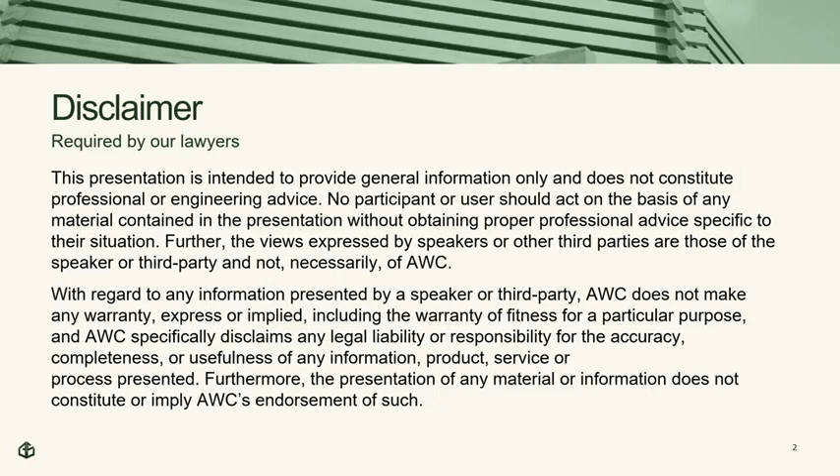AWC received ANSI approval of its 2024 Fire Design Specification for Wood Construction as an American National Standard on September 28, 2023. The standard, designated as FDS 2024, is primarily the 2022 version of the Fire Design Specification that has been revised to better coordinate with Chapter 16 of the 2024 National Design Specification for Wood Construction.

The FDS brings together provisions for fire design of wood members, assemblies, and connections to meet code requirements. This presentation will discuss the history of fire design provisions for wood construction, existing wood design provisions currently in building codes, wood design standards, and numerous design aids incorporated into the standard, and adds additional calculation procedures to address the added fire resistance and thermal benefits of protection provided by wood cover, gypsum panel products, and insulation.

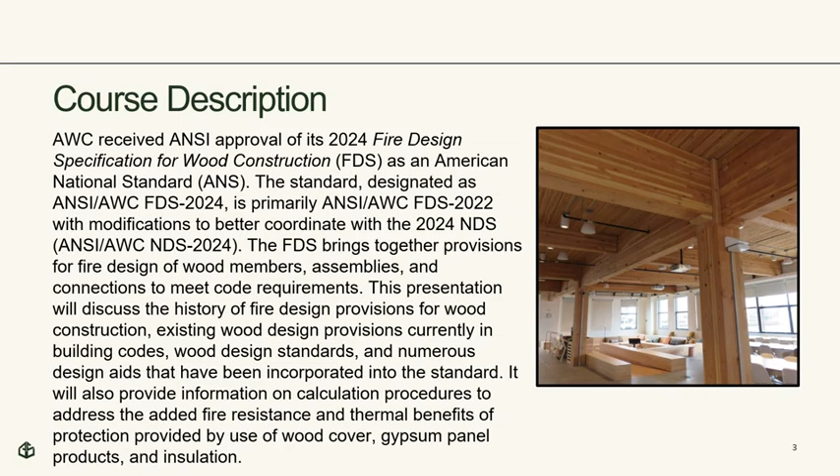The learning objectives for today's webinar are: discuss the history of fire design provisions for wood construction and fire research data for protected wood members; explore general information about the Fire Design Specification standard, including definitions and notations as well as general fire design requirements; examine the specifications listed in the FDS for ignition and flammability requirements for wood products; and review calculation procedures used to address the added fire resistance and thermal benefits of protection provided by the use of additional wood cover, gypsum panel products, and insulation.

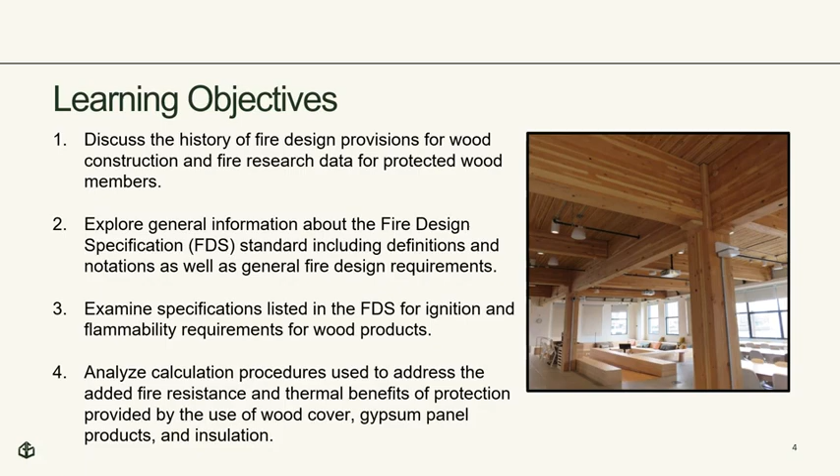Before I get into the discussion about the Fire Design Specification, I'd like to provide a bit of history on how we arrived at a point where the standard was developed.

For decades, researchers worked on methods of predicting the fire resistance of wood products. Since there were no calculation procedures, the wood industry, along with other material groups, ran comparative tests of structural members and assemblies in order to provide some level of acceptance. Wood products were specifically targeted because they were combustible materials that, even though they had good structural fire performance, better than some materials, it still needed a benchmark level.

A particular interest was heavy timber mill and warehouse buildings that were being retrofitted for new mercantile and multifamily occupancies. Designers were concerned about the fire performance of these buildings, even though there were literally hundreds of years of experience with their performance.

In 1977, T.T. Lie, a researcher with the National Research Council of Canada, published a report outlining an empirical method for estimating the fire resistance time of large beams and columns. That method was adopted in the National Building Code of Canada shortly thereafter.

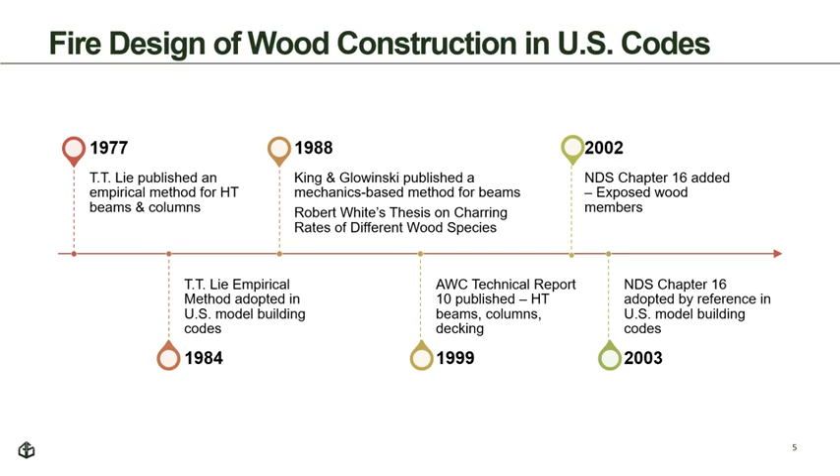Work continued on TR10. In 2013, the mechanics-based nonlinear char model was used to predict results of unprotected floor joist assembly tests. As a result of the model's ability to predict the performance of full-scale wood frame joist floor tests, it has been used as a basis for membrane protection provisions for wood I-joists.

The limitations of applying the model to only large cross-section wood members was removed from TR10 and the NDS Chapter 16 in 2013.

In 2015, the model was used to accurately predict fire test results of exposed structural composite lumber, beams, and columns. Also introduced for the first time was a new model for exposed cross-laminated timber. The cross-laminated timber char model was the first deviation from the original nonlinear char model. While the CLT model uses the nonlinear char model, it resets as the char front reaches the glue line between each layer.

In 2015, the NDS Chapter 16 provisions were expanded to cover structural composite lumber products that had been tested, i.e. laminated veneer lumber (LVL), parallel strand lumber (PSL), and laminated strand lumber (LSL). Also, a new cross-laminated timber stepwise char model was introduced for CLT design.

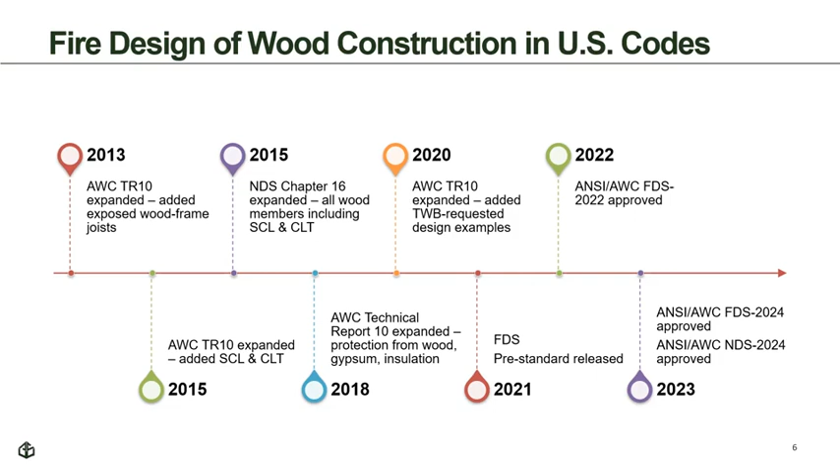Here are some of the modeling results of protected wood members used in the development of TR10. Again, the diagonal line indicates where the modeling results equal the test results. Data points above the line are over-predicted and points below the line are under-predicted.

Top left is gypsum wallboard protected stud walls. Below on the left is gypsum wallboard protected floor ceiling assemblies. The upper center shows burn through of rim boards. Lower is burn through of gypsum wallboard protected rim boards. Top right is gypsum wallboard protected SCL beams. And bottom right is gypsum wallboard protected CLT floor slabs.

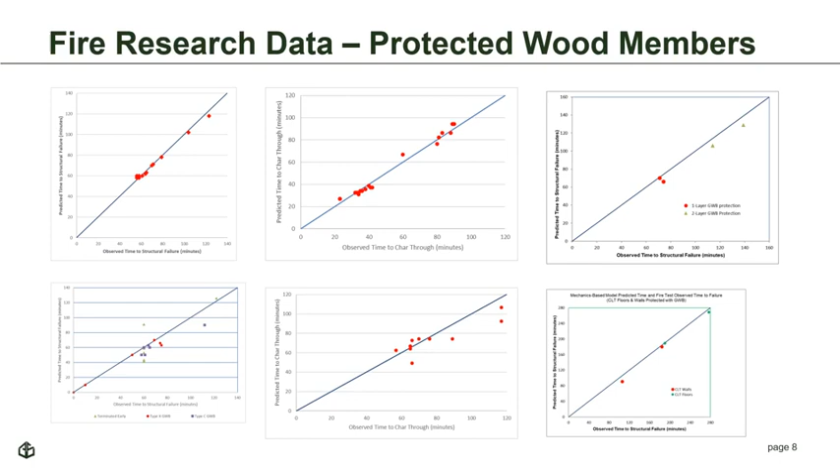One more graphic to demonstrate how the new provisions in TR10 and the FDS are being used. These test results were used to determine the contribution of gypsum wallboard protection for tall mass timber, types 4A and B construction. In this test series, otherwise identical assemblies were tested with no protection, i.e. the control, one layer of 5/8 type X gypsum board, and three layers of 5/8 type X gypsum board.

Each test was taken to either structural failure or a mid-span deflection of 12 inches, which corresponded to structural failure in the first unprotected test.

As can be seen here, a single layer of 5/8 type X added 41 minutes and 3 layers of 5/8 type X added 127 minutes, which averages out to about 42 minutes per layer. Altogether, these tests confirmed that 40 minutes of protection time can be assigned to each layer of 5/8 type X gypsum board when it is used as a non-combustible protection on mass timber.

Not coincidentally, this also corroborates the 40-minute time assigned to 5/8 type X gypsum board in the Fire Design Specification provisions and in the IBC section 722.6 when it is used as a membrane in light frame wood assemblies.

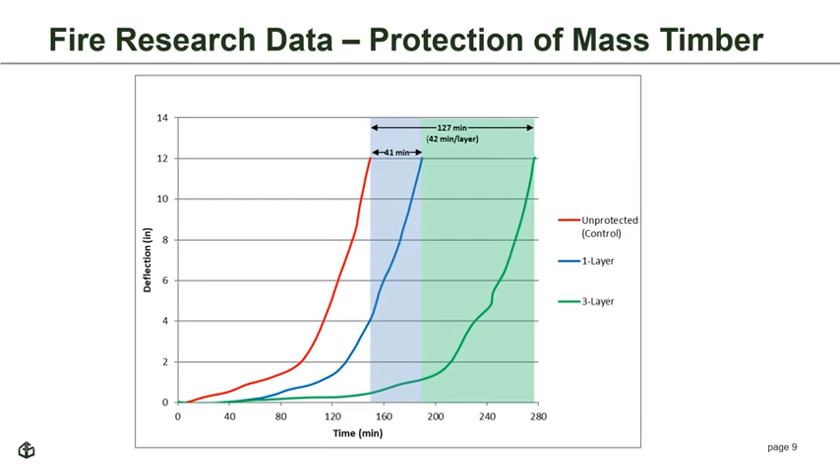The 2022 Fire Design Specification for wood construction was completed in August of 2022 and was approved as an American National Standard on September 13, 2022. While design provisions for exposed wood members have been in the National Design Specification since 2002, the 2022 Fire Design Specification goes well beyond the NDS, covering such things as design of fire protection of wood members, design provisions for thermal separation and burn through, design of protection of connections, design for fire blocking, draft stopping, and much more.

However, work to update the 2018 National Design Specification to the 2024 version was still underway. As part of that update process, it was acknowledged that coordinating changes needed to be made to the 2018 NDS Chapter 16 and the 2022 Fire Design Specification. For the most part, these changes were primarily to section numbers and other provisions in both standards. There were also changes to the scope in the NDS Chapter 16 and similarly the scope of the Fire Design Specification. There were also a couple of technical changes primarily to clarify the intent of the provisions in the 2022 Fire Design Specification.

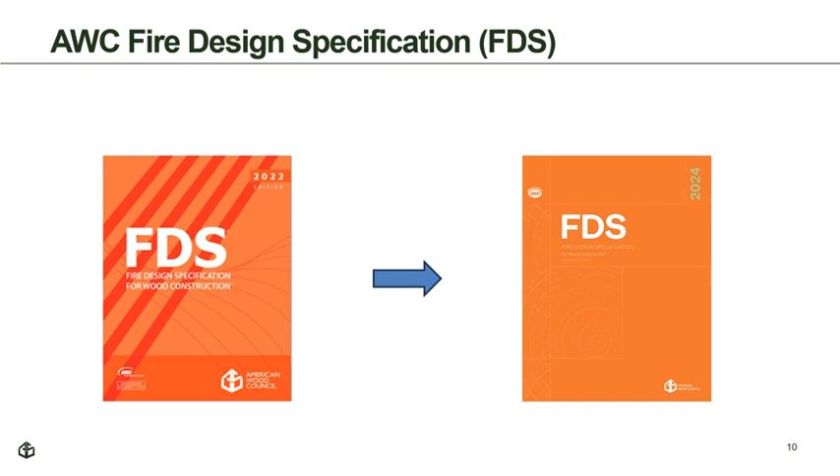Okay, so let's get into the Fire Design Specification for wood construction. Chapter 1 provides general information about the standard, provides definitions and notations as well as general fire design requirements. Section 1.2 terminology updates definitions of terms used in fire design specifically to address wood construction. Section 1.4 material standards provides identification of building material and product standards and special requirements for fire design.

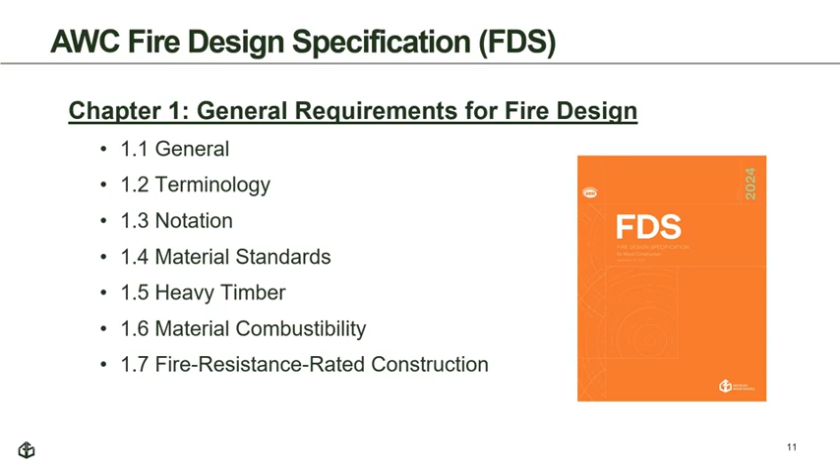Section 1.5 heavy timber enhances descriptions of heavy timber elements that are currently in the building code and clarifies dimensional requirements for heavy timber framing, dimensional construction requirements for heavy timber roof decks and floor decks and walls, and it adds acceptable types of toppings for heavy timber floor decks. One of the specific additions is the allowance of concrete or gypsum concrete toppings as a heavy timber floor deck.

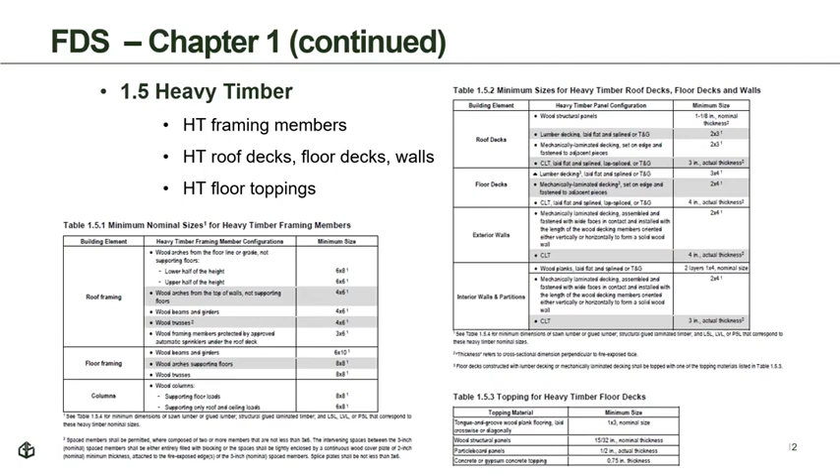Section 1.6, Material Combustibility, clarifies requirements for combustible and non-combustible materials. It brings forward a building code exception that allows certain composite products like gypsum panels to be considered non-combustible materials, even though they usually have a combustible facer on the product. The provisions also clarify that if a product is not considered non-combustible, it is combustible and subject to the requirements in Chapter 2 of the Fire Design Specification.

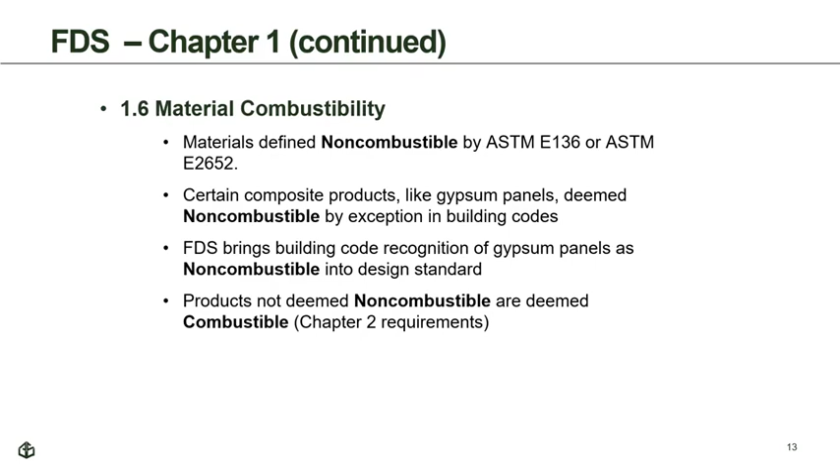Section 1.7 of the Fire Design Specification provides design information of fire-resistant rated construction. This chapter was extensively revised between the FDS pre-standard and the 2024 Fire Design Specification.

It clarifies requirements for fire-resistant rated wood members and assemblies. It adds clarifying requirements for continuity of fire resistance rating for assemblies, not continuity of the assembly itself, which was clarified in the 2024 IBC. It adds requirements for supporting fire-resistant rated assemblies, including special requirements for platform construction, which was also clarified in the 2024 IBC.

It clarifies that where a wood column is in a wood frame wall assembly, protection provided by the wall assembly can be included as part of the structural fire resistance of the design of the portion of the column. Where the column is entirely within the fire resistant rated wall assembly, the column can be assumed to have the same fire resistance rating as the wood wall assembly.

This is a slight difference in wording from what is in the code now, because some people have interpreted the current code language to only allow the fire resistance rating if it's the same as the wall, where this provision would allow the contribution from the wall to be included as a portion of the column protection. It's a slight nuance, but if you read through the code provision, you'll see the difference.

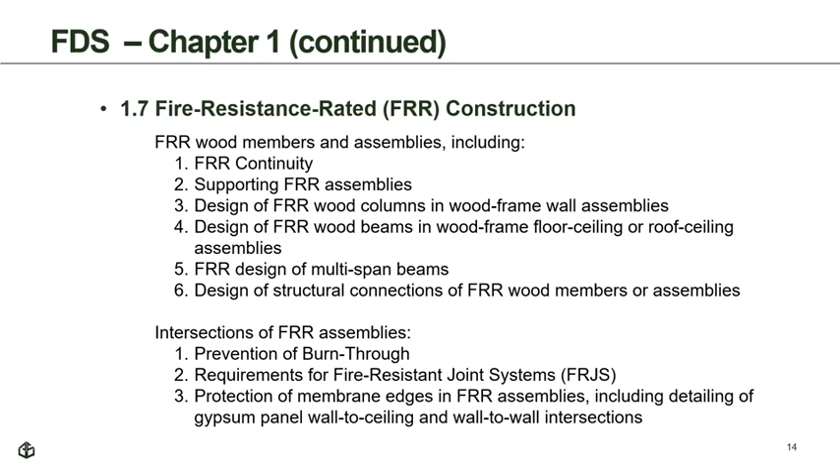Chapter 2 of the Fire Design Specification specifies ignition and flammability requirements for wood products and provides reference test standards to be used to show compliance with these requirements.

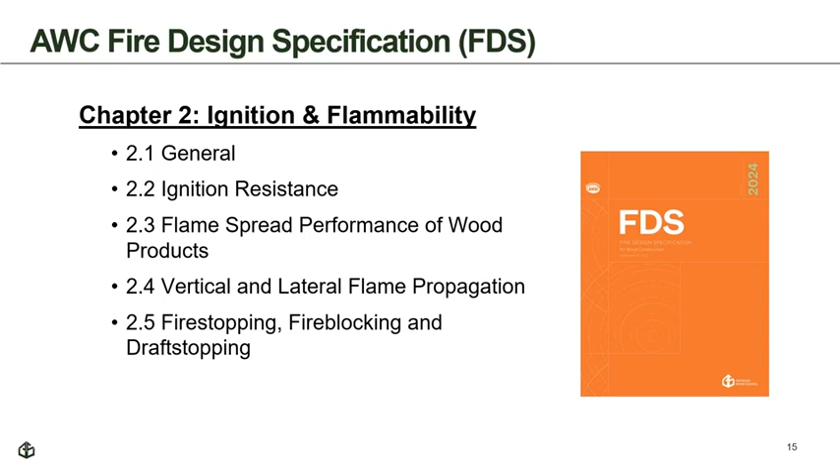Section 2.2 clarifies requirements for ignition resistance of wood products used on exterior surfaces. Wood products are typically exempt from the current NFPA 268 test because ignition usually occurs at or above a heat flux of 12.5 kilowatts per meter squared for wood products. But wood products are prescriptively limited in their use as exterior coverings because they are defined as combustible.

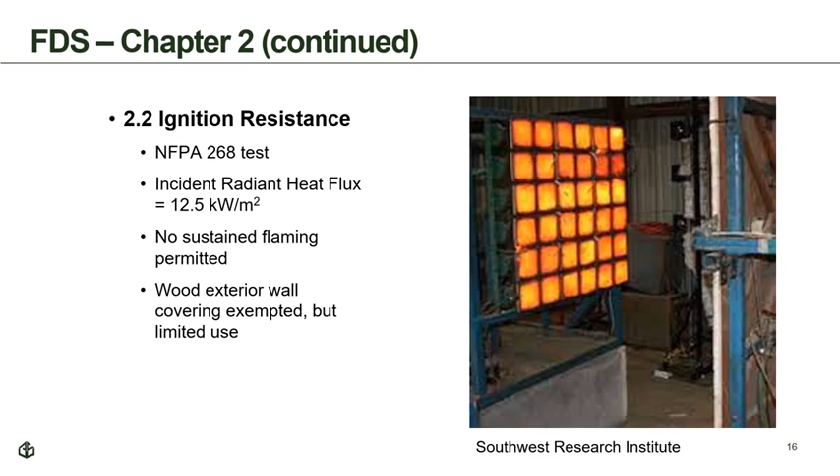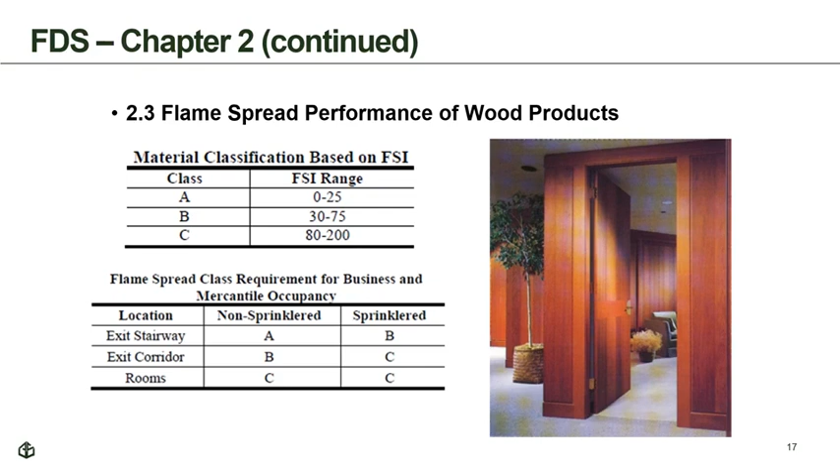Section 2.3 clarifies requirements for flammability of wood products. The wood industry has conducted extensive E84 testing of lumber species and wood panel products. AWC's DCA1 contains a list of industry E84 flame spread and smoke development test results. That list has now been incorporated into the Fire Design Specification's Supplement A.

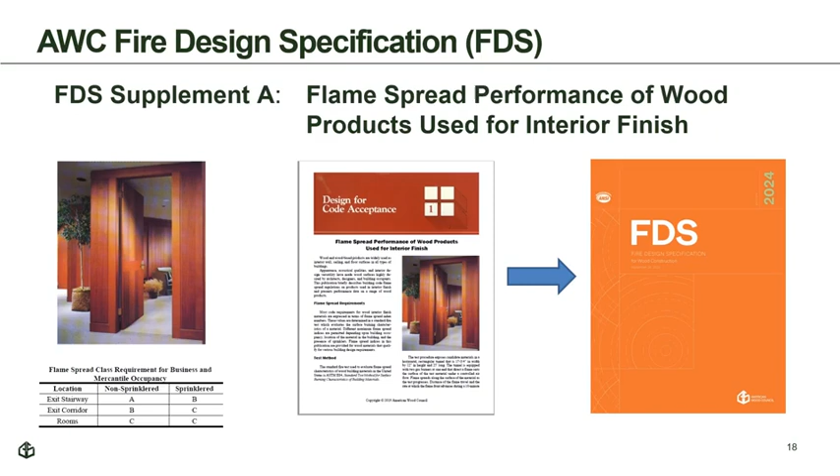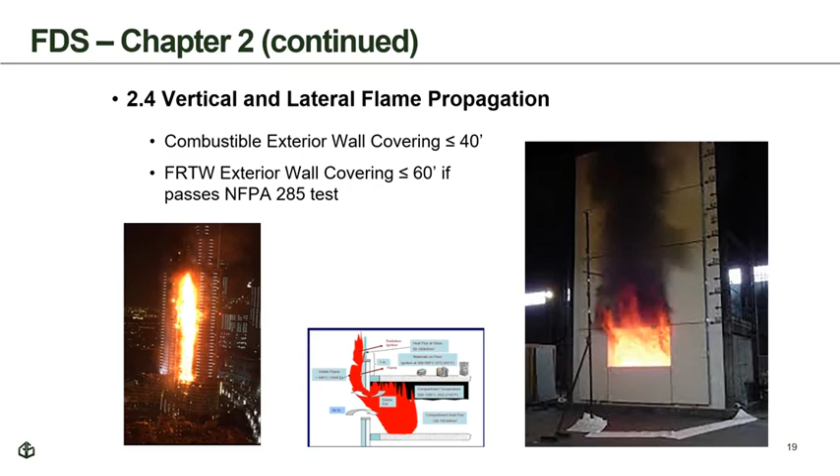Section 2.5 clarifies the difference between three types of installations: fire stopping, fire blocking, and draft stopping. There are three types of proprietary fire stopping products, and the FDS clarifies where they are required in wood construction: membrane penetration fire stop systems that penetrate just the membrane; through penetration fire stop systems, shown in the center figure, where it penetrates a wall or floor; and fire resistant joint systems, shown on the right, where you want to stop passage of fire from one occupant to another.

For fire blocking, the FDS provides an expanded list of 9 materials deemed acceptable as fire blocking materials, including criterion for approval of alternate fire blocking materials. It also clarifies where fire blocking is required in wood construction. For draft stopping, the FDS provides a list of 6 materials deemed acceptable for draft stopping and clarifies where draft stopping is required in wood construction.

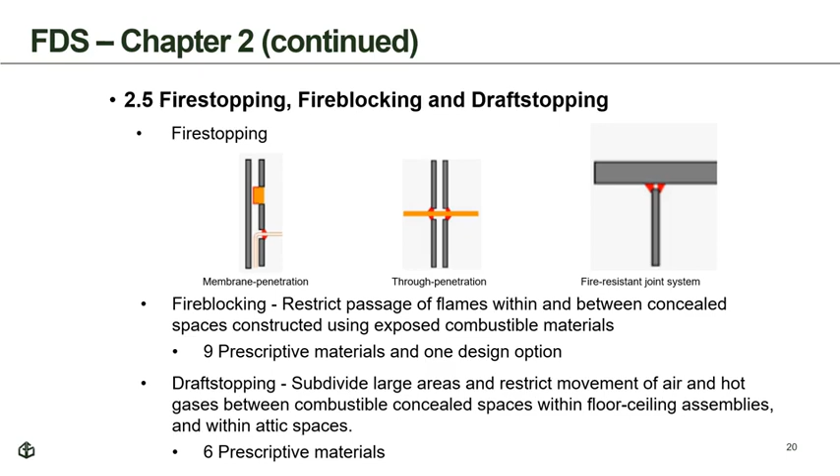Chapter 3 establishes fire-resistant design provisions that apply to all wood structural members, assemblies, and connections that can be designed using the National Design Specification. For those familiar with the 2022 FDS, the format of this chapter has changed slightly to correspond with changes in the 2024 NDS Chapter 16.

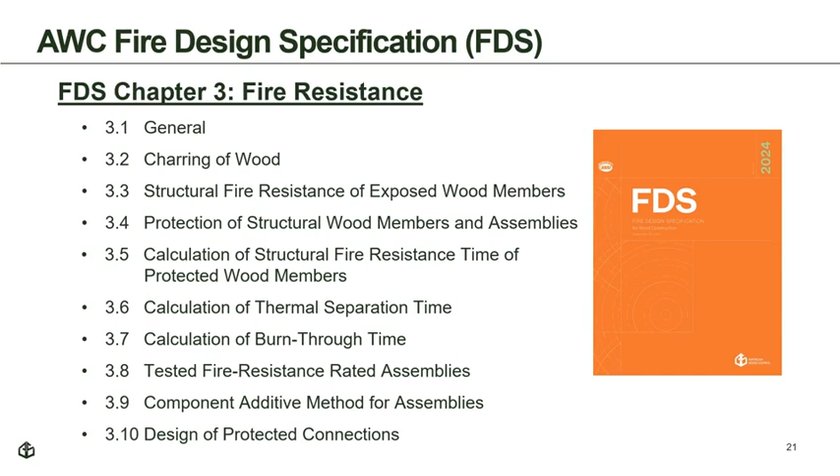Section 3.1 provides general scoping applicability limits of the Chapter 3 provisions. It provides a reference to ASTM E119 or UL 263 to define the exposure used to meet the requirements of Chapter 3. It provides a list of requirements where the fire resistance rating is determined by testing or by calculation. And it provides a method for determining design loads when using a calculation method with either allowable stress design or strength design provisions. Inclusion of strength design for LRFD has long been requested in the NDS Chapter 16 provisions, but until this section was written, it wasn't possible to do that. It basically matches the provisions in Annex A of the E119 test method.

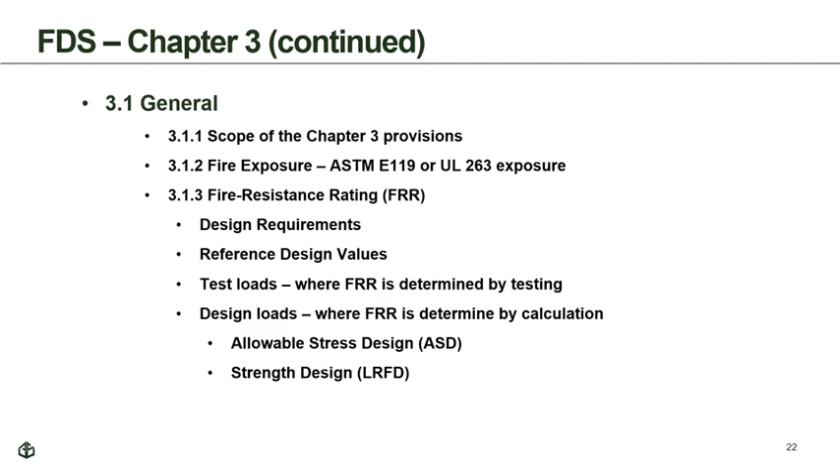Section 3.2 provides calculation procedures for determining char depth of solid wood and cross-laminated timber members, consistent with NDS Chapter 16 provisions. It implements procedures for determining and designing for char penetration at intersections of abutting edges and exposed wood members. It provides an enhanced method of designing exposed lumber decking to allow use of char penetration concepts in lieu of prescriptive methods permitted in the NDS Chapter 16.

It clarifies special provisions for structural glue laminated timber provisions that are in NDS Chapter 16. In previous versions of the NDS and the 2022 Fire Design Specification, the provisions for calculating char depth and the provisions for designing structural wood members using effective char depth were combined. During balloting of the 2024 NDS, it was pointed out that these provisions needed to be further separated, especially in the Fire Design Specification, where char depth is often used for determining protection for wood members, not just structural calculations. The provisions, while not changed, have been rearranged in the 2024 FDS and 2024 NDS to clarify the intent. Also in the 2024 FDS, the provisions for char penetration have been reorganized and clarified, streamlining the design process.

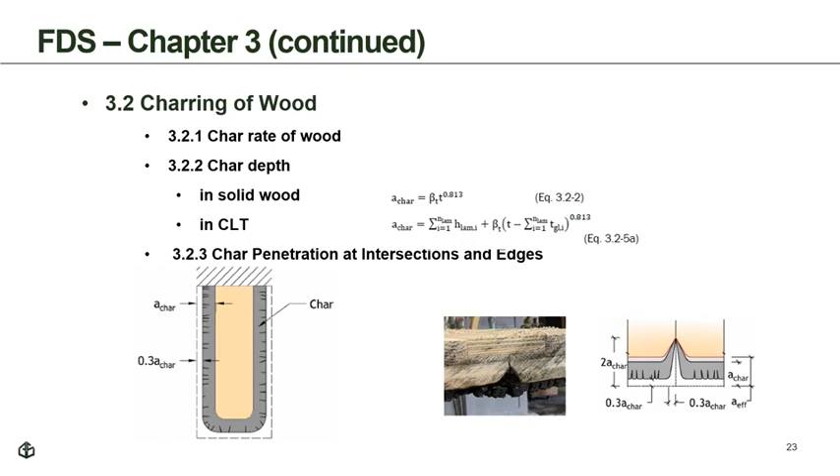Section 3.3, Structural Fire Resistance of Exposed Wood Members, provides calculation procedures for determining structural fire resistance of exposed wood members consistent with NDS Chapter 16 provisions. It also provides equations for calculating the bearing area for fire design. For fire design of bearing perpendicular to grain, dimensions of the bearing area measured from each exposed edge of the bearing interface were reduced by an effective depth of 1.5 times the char depth, not the 1.2 times the char depth used for calculating effective areas for other wood members. This adjustment is in recognition of the strength and stiffness loss of wood perpendicular to grain when exposed to steaming, when moisture and temperature below the char temperature occur together.

While this provision was in the 2022 FDS, it was combined with requirements for checking char penetration at bearing interfaces, so the two checks were combined into one, requiring the bearing area to be reduced by up to 2 times achar. Further analysis and discussions within the committee concluded these checks should not have been combined — they're two separate issues. So the 2024 FDS only checks the bearing area using 1.5 achar.

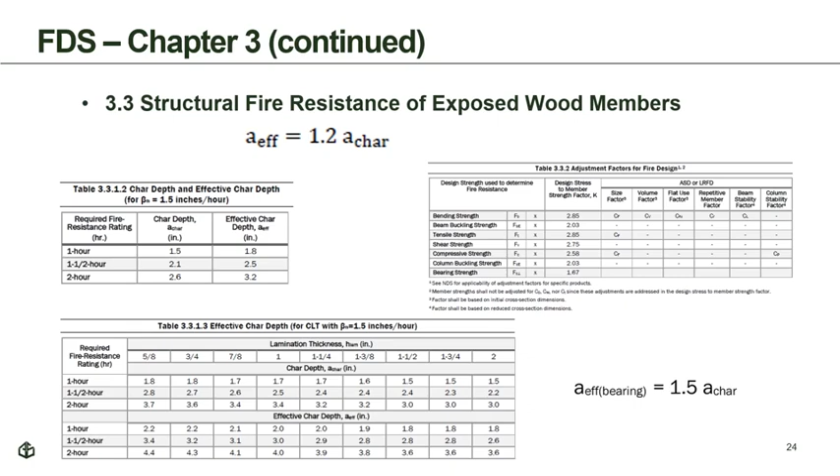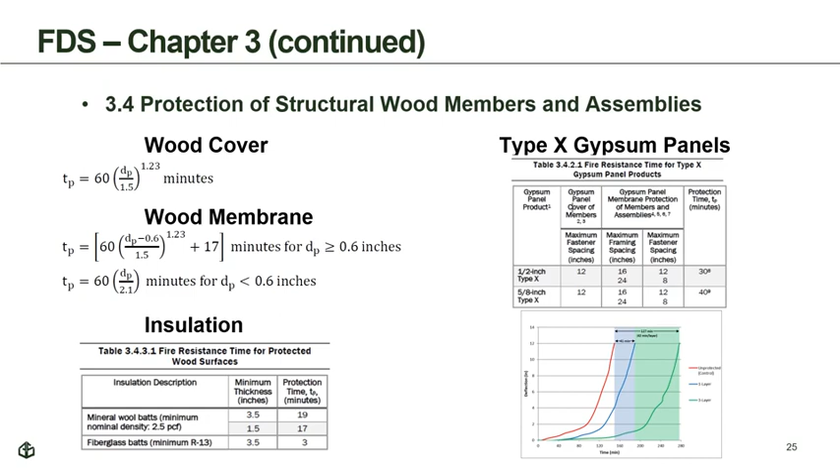Section 3.5 provides provisions for calculating the structural fire resistance time of protected wood members and assemblies. These are basically provisions for providing the protection time for multiple layers of wood cover, multiple layers of gypsum panel protection, and then for insulation. It should also be noted that these are not necessarily additive with the fire resistance of the wood. It basically delays the onset of charring on the protected face of the member. So depending on whether it's protection on the face or protection of a whole assembly, you might get slightly different answers.

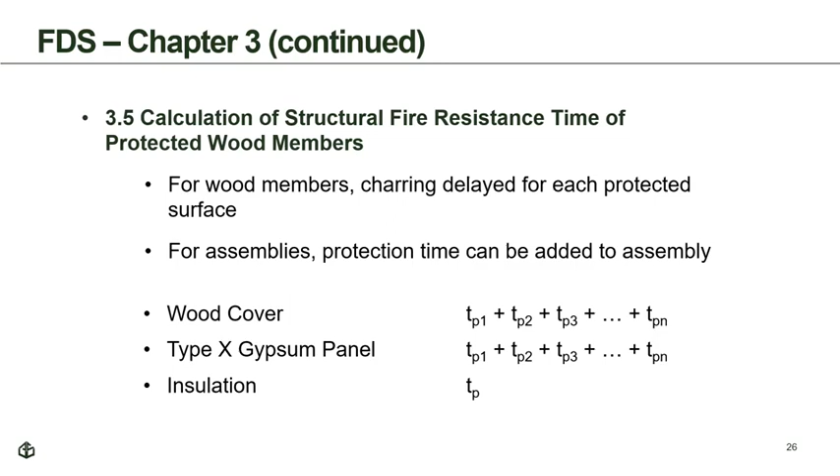Section 3.6 provides provisions for calculating thermal separation time provided by an assembly of wood layers, Type X gypsum panel products, and insulation. It starts with the same times assigned to the wood cover, the gypsum panels, and the insulation. The big difference here is that the last layer providing resistance is reduced because of the potential of off-gassing on the backside of the product.

For wood cover, that means we only use 85% of the time assigned to the last layer, the layer closest to where we're looking at the thermal separation. For gypsum board it's similar - the off-gassing of steam or water in the gypsum means we take a somewhat conservative reduction of 0.5 times the time assigned to the gypsum board. For insulation, we just use the time assigned for the insulation.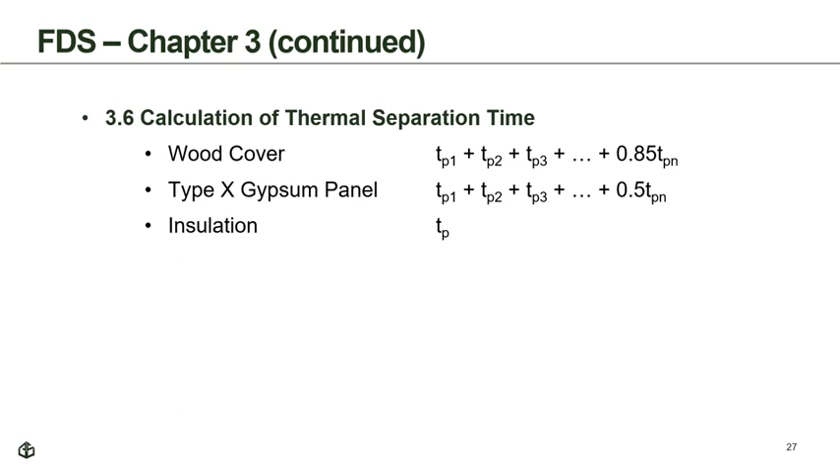For gypsum panels it's similar, although with a conservative estimate of 0.5 of the protection time - that's actually at the low end of the finish rating of gypsum, so there isn't much shrinkage at that point. We don't have the same issue as long as we're using a lesser protection time, so that's at 0.5 times the thermal protection time.

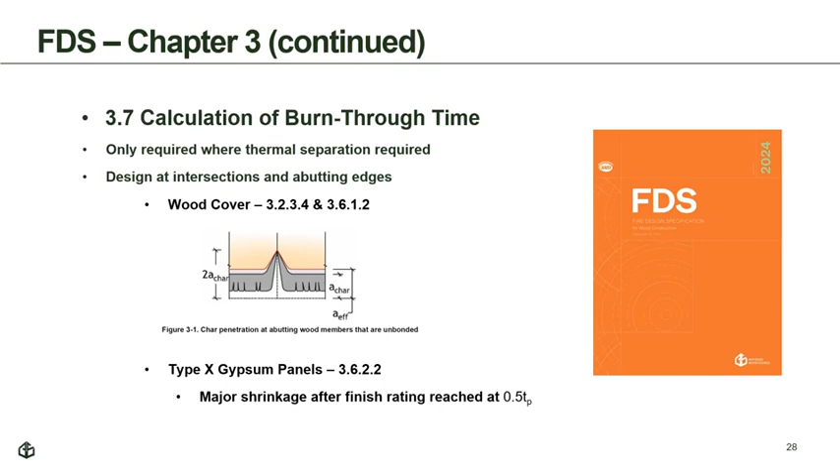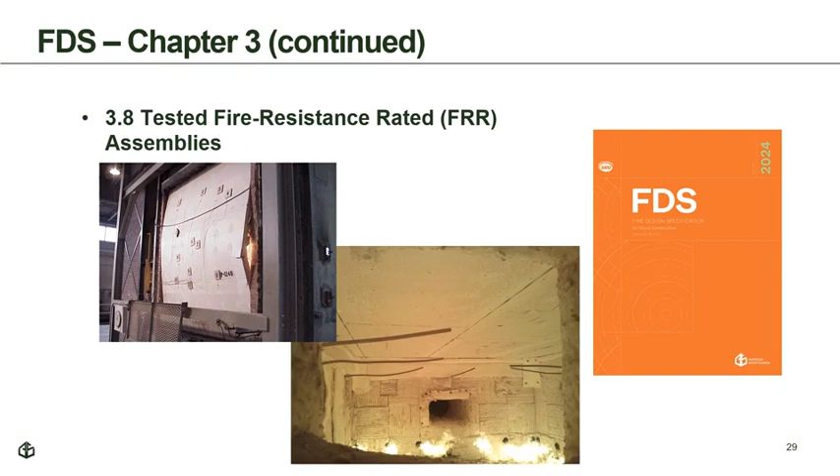Section 3.8 provides reference to industry-tested fire-resistant rated wood assemblies that are provided in Supplement B to the standard. The list of industry E119 fire-resistant tested results currently contained in AWC's DCA3 have been incorporated into the Fire Design Specifications Supplement B. Note that most of these assemblies are currently included in IBC section 721.

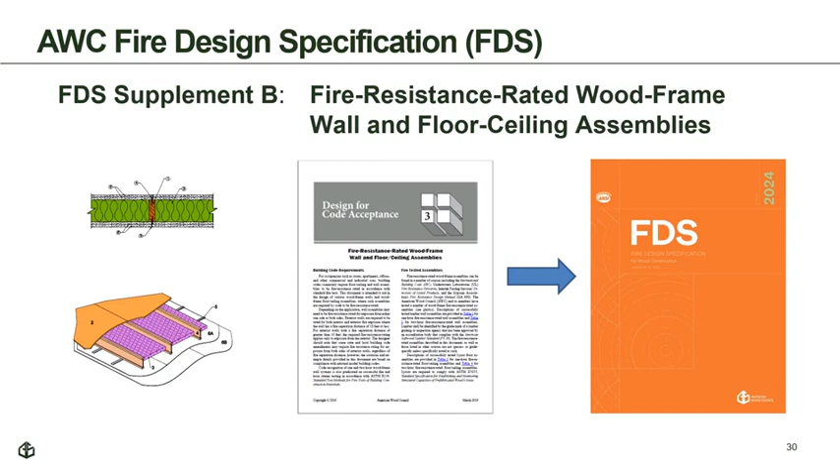Section 3.9 provides an enhanced component additive method. The assigned times in this method are based on calculation methods in FDS Chapter 3 and verified by comparison with full-scale test data. Here's a stud wall calculation example. These results have been corroborated with industry tests.

In this example, doing the structural calculations, we only include the 5/8 Type X gypsum on the exposed side, and the assigned value for a 2x4 stud wall protected with 3.5 inches of mineral wool insulation is 23 minutes, for a total time of 63 minutes. On the thermal separation calculations, on the unexposed side we use half of the 40 minutes, which is 20 minutes, 19 minutes for the mineral wool insulation, and 40 minutes for the protection from the exposed side gypsum, for a total of 79 minutes. This is corroborated again with test results - I think this assembly actually achieved right around 63 minutes, was never close on the thermal temperature rise, but did fail structurally.

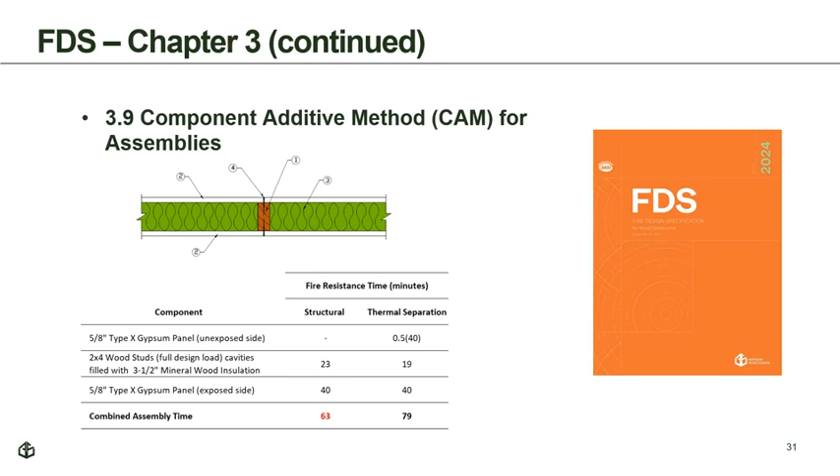Here's a wood joist floor ceiling calculation example. On the structural side, we only account for the joist and the gypsum. The 2x10 joist protected with 1.5 inches of mineral wool insulation provides 27 minutes, and the 5/8 Type X gypsum panel on the exposed face is 40 minutes, for a total of 67 minutes.

On the thermal separation calculations, the wood structural panel gives us 14 minutes, but we can only use 85% of that because of the temperature rise. The insulation gives us 15 minutes, and the 5/8 Type X gypsum panel again gives us 40 minutes, so that's 67 minutes. However, note the point at the bottom: if you account for the gaps that can occur in that panel, you would estimate burn through would occur at the gaps between the single layer of floor covering at 62 minutes, so there would need to be some additional protection provided there to achieve 67 minutes.

62 minutes still passes the test, so you've probably seen this test result with no additional cover, but sometimes it works out better to put 2 layers there to make sure that thermal separation isn't the failure mechanism, or burn through isn't the failure mechanism of that tested assembly.

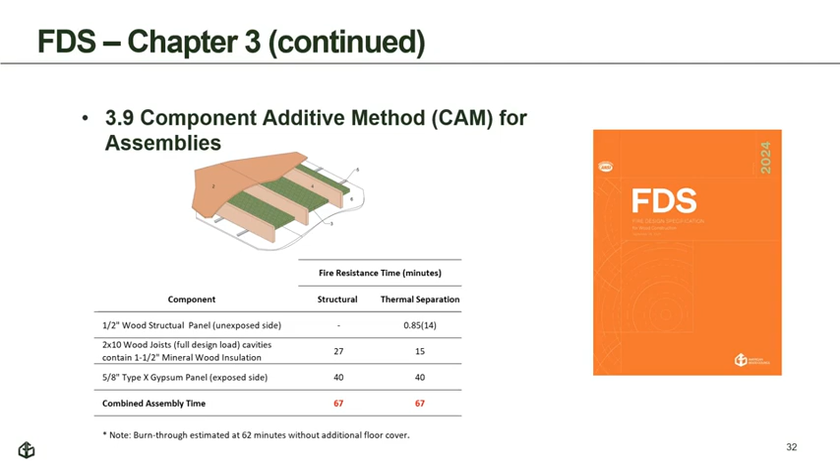Here's a wood I-joist floor ceiling calculation example. With an I-joist, there are 2 structural calculations that you need to check: one is the structural flange, and the other is the structural web.

In this particular assembly, we have a 1x4, basically 3/4 of an inch wood strip that holds the insulation up, but it also protects the bottom flange and the web. These calculations have been pre-done for the user. In this assembly, we got 26 minutes out of the flange, and 40 minutes for the gypsum, for a total of 66 minutes. For the structural web, we get 20 minutes because the web isn't really exposed for some time into the test. The 40 minutes is again for the gypsum, so we calculate 60 minutes.

The thermal separation calculation is the same as the one we did previously: it's 15 minutes, 85% of 13 minutes for the 15/32 wood structural panel, 15 minutes for the 1.5 insulation, and then 40 minutes for the gypsum, for a total of 66 minutes.

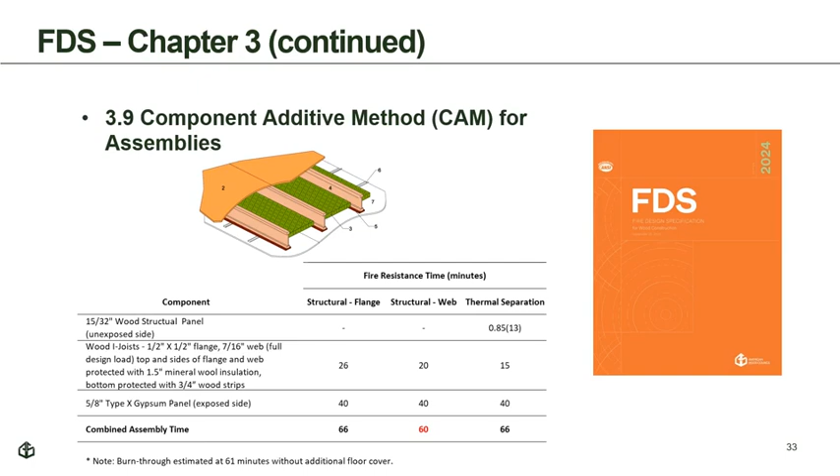Section 3.10 provides specific requirements for design of fire protection for connections. Here are 3 example connections of wood members that are required to have a fire resistance rating. These examples were all designed using wood cover to protect the connections, but similar protection can be provided by gypsum panels, a combination of wood cover and gypsum panels, or some other proprietary configurations. All 3 of these examples are in Technical Report 10. I invite you to review those, and see that we deal with not just the char rate, but the char penetration between intersections—that's an important part of designing this protection.

Some of the proprietary systems use friction fit, or they use intumescent caulks or intumescent tape to help seal these gaps. There are quite a few proprietary systems out there, and more every day for mass timber. So I invite you to look at that in some detail.

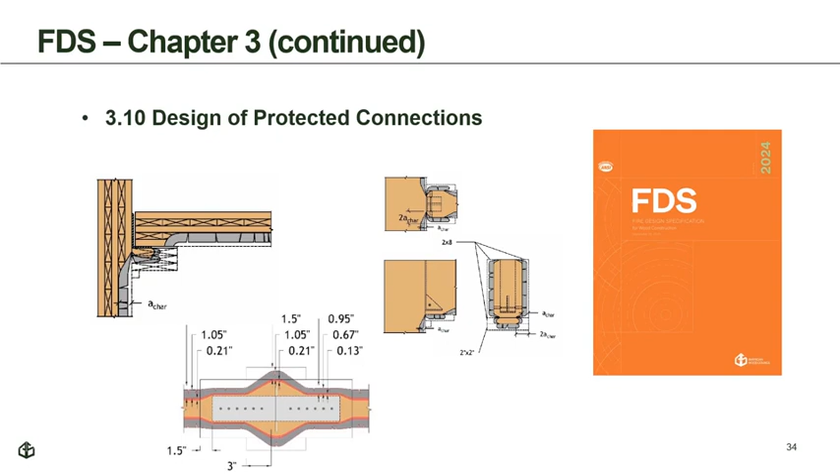One of the major issues when designing wood connection protection is detailing the wood members and protection to account for char penetration. Where the edges of wood elements abut, such as at the edge of a beam and column interface, the potential effects of char penetration should be evaluated. You look at this figure and say, okay, well, everything's covered up pretty tight—but char penetration, even if it's initially tight, can still be a concern.

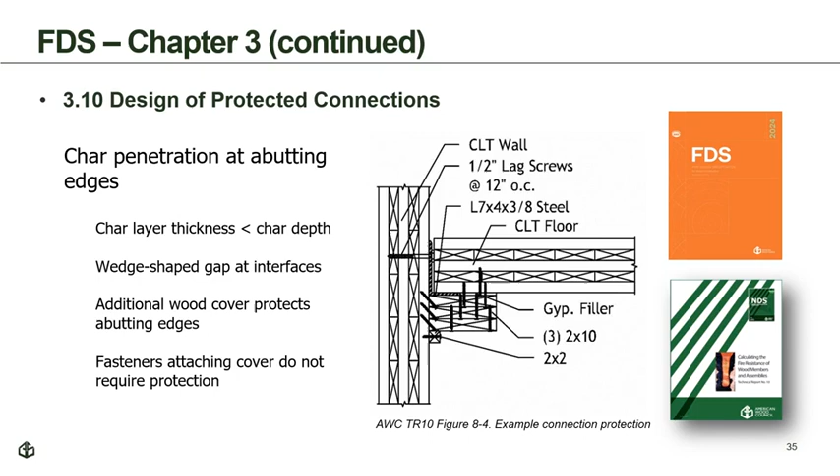Let's talk about char penetration as it works for designing these connections. As wood chars, its volume decreases such that the thickness of the char layer is less than the char depth. This difference between the char depth and the thickness of the char layer is approximately 0.3 times the char depth at any given time. This contraction can result in the formation of a wedge-shaped gap which propagates along the interface between the two wood members.

For relatively tight-fitting intersections up to 1/8 inch wide, the FDS provides assumptions of ignition that extends into these gaps for a distance approximately twice the char depth. As a result, additional wood cover or blocking is required to protect the area around the abutted edges. Fasteners used to attach protection are not required to be protected.

This is again the example I showed a second ago, one of the examples covered in Technical Report 10. This diagram depicts the profile of the char front on a floor-to-wall ledger connection when the steel angle hardware is properly protected. The char depth is labeled as a char. The char thickness is the width of the gray area, and you can see that the char front has formed a wedge-shaped gap at the interface between the wall and the 2x protection members.

But the protection has been designed to account for the char penetration at the interface between the CLT and the 2x protection members. Because of this, the char front does not quite penetrate all the way to the steel hardware, so it's an acceptable design.

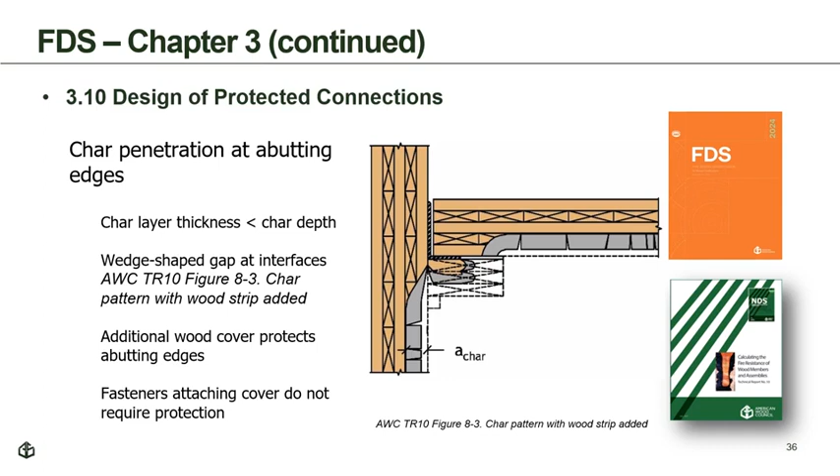As the latest addition to AWC's family of wood design standards that have all been approved as American national standards, the broadest acceptance is being sought in the regulatory arena. It's our hope that today's session is a brief look at the new Fire Design Specification, and there will be additional presentations on more detailed analysis using the Fire Design Specification in the future.